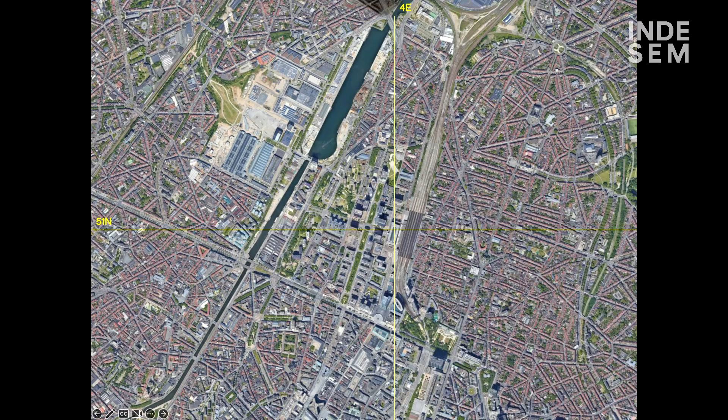I don't know if you've ever been there, but if you arrive through the North Station in Brussels, you end up in a very schizophrenic world, in between a large business district built in the 70s and one of the poorest communes of Belgium, in between corporate worlds and the poorest region of Belgium. In the middle there is a station, and in the station we have our office, in the former train museum, which is quite exciting.

We rent it from the NMBS, the Belgian Railways. Partly it's our offices, but half of the square meters we rent out. One of these spaces is a double-height mezzanine space, which used to be the central location of the first locomotive of Belgium. Now we rent it out as an event space, both to organizations in the northern quarter, social organizations, but also more corporate events, trying to mix the two and take an active role in our context.

I would try today to talk about 3 projects which work around the theme of obsolete buildings, and then talk about RECAST, a first introduction of RECAST to the world.

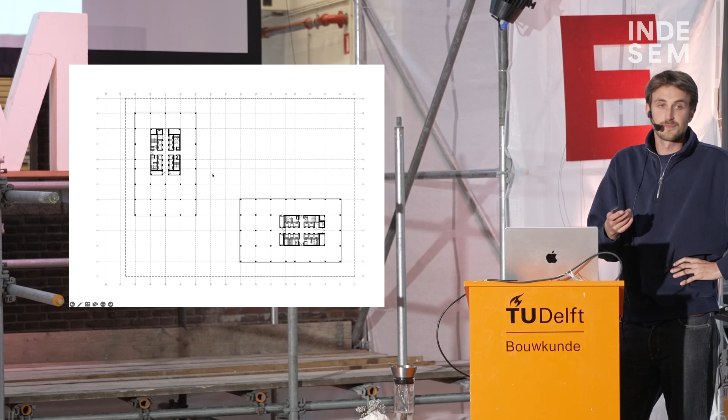In this context, these two buildings were there. They were vacant, considered end of life. The structure itself was too thin, a steel structure, so the columns and slabs were steel, not fireproof. The client or owner of this building organized a design competition to know what to do with this site.

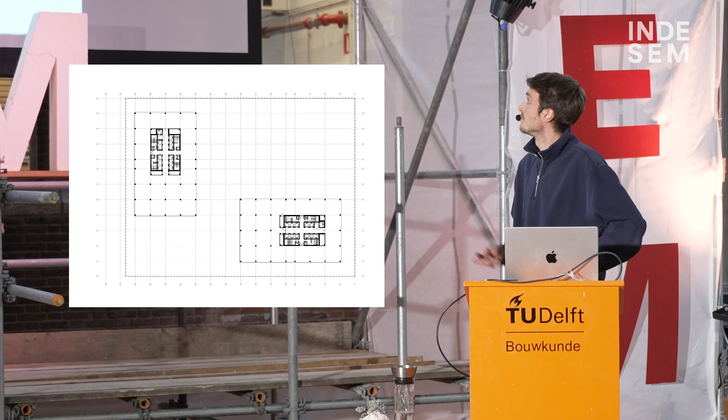Almost all the competitors got rid of it, they demolished it. And 51N4E came with this solution: to keep the cores of the building, the two central cores, and the whole foundation, everything underground. On top of this existing grid of columns, we rebuilt a new structure around these two cores.

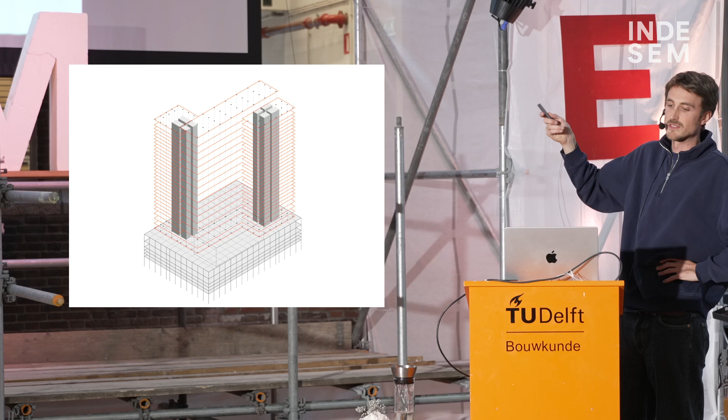But instead of rebuilding the two towers as separate towers, the idea was to build a third volume, the capable volume, a tower of 2-story high stories, skipping every floor. This resulted in this moment in the demolition, where the building around the core was demolished.

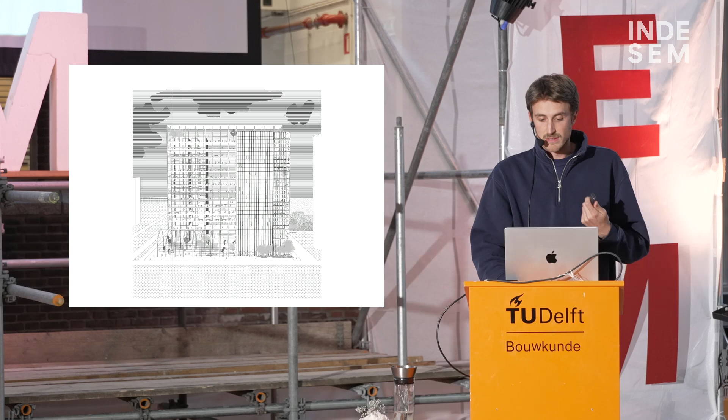We tried to recover as much of the materials as possible, but the cores were still there. The idea was to maximize the square meters around these two cores, keeping as much of the concrete and the CO2 embedded in this structure as possible. This is the sort of the two sections that you get.

Of course, if you keep the core and you keep the stairs, you have to keep the height of the spaces, which was actually too low for the Codex Welzijn, a comfort level required for a workspace. So we couldn't get the 2.70 meters that was required for the Flemish government to enter the building.

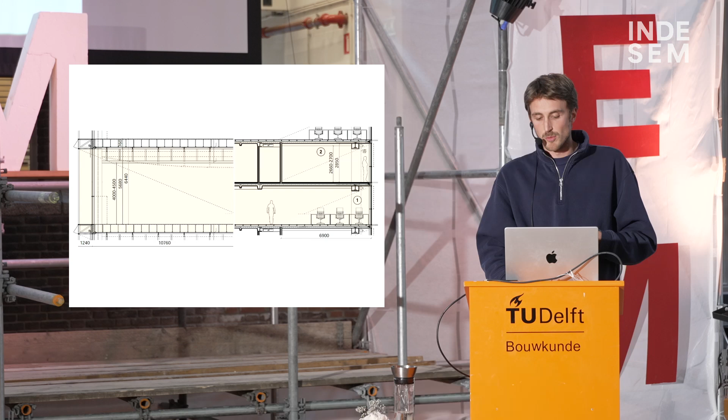That was the idea. The client wanted to have one big renter for this entire tower. That was one problem, and the second problem was that the Flemish government, the government of one part of Belgium, didn't want to work in towers because they wanted a sort of horizontal collaboration flow.

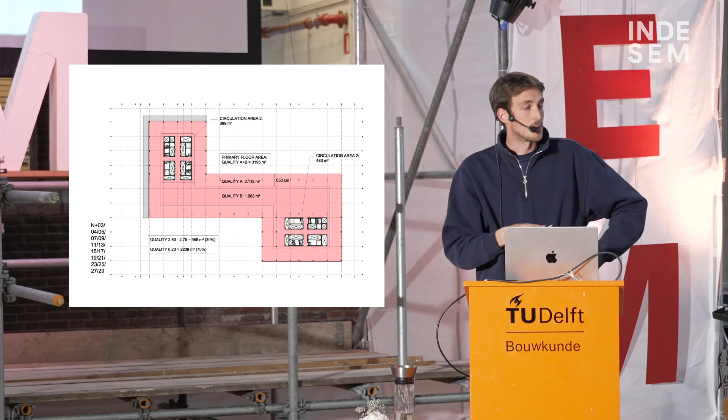By gluing the two towers together, you get these very big floors of more than 3,000 square meters of floor area. So all the odd numbers of floors had this plan where you had a sort of connection between the two cores. Another ambition was to make it a hybrid building, not making the same mistake as the past of creating a monofunctional neighborhood.

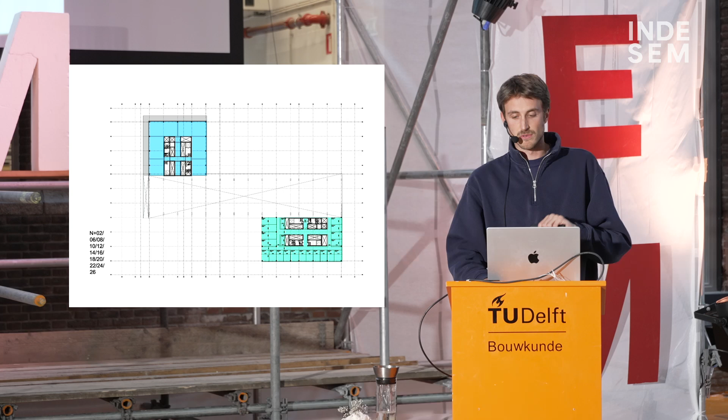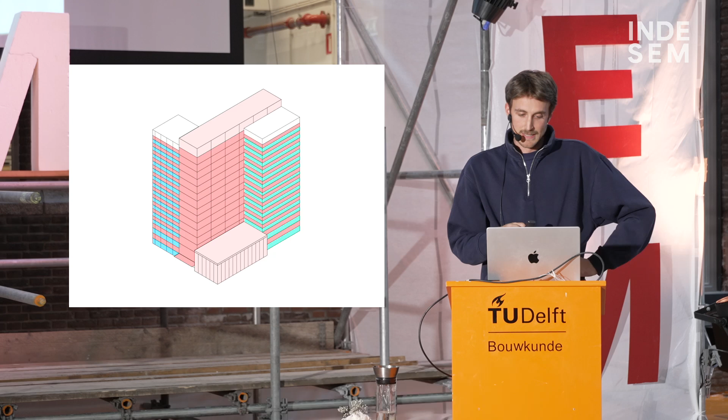Instead, the idea was to combine housing, hotel function, and commercial spaces, rather than making separate buildings for these functions. The even floors were for the Flemish government, and the odd floors were housing and hotel space. So you end up with what we call the zebra model, a sort of hybrid building, but still one building.

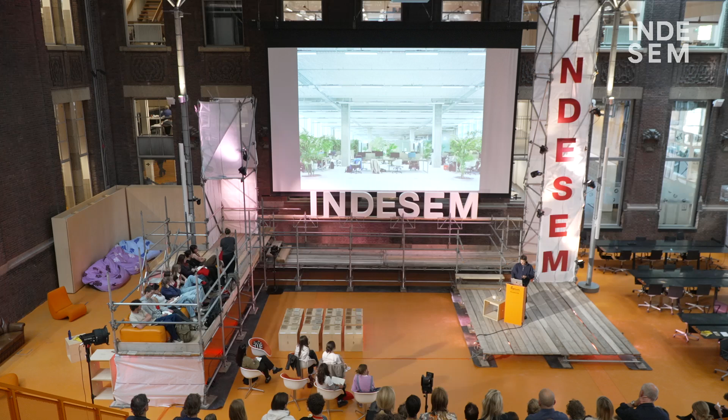This is the type of spaces that you get by having these super high floors. Because of the double height, you get the light way deeper into the building, which makes it possible to have workstations in the middle of the building. Normally you can only have your desk close to the window because the light needs to enter, and the further you go from the window, the less light enters. There's a regulation that doesn't allow workstations there, but because of this height, we could make this entire floor primary floor area.

In the two towers, the lower floors were this meeting center where no one would have a permanent workspace, so the height of 2.60 was not a problem, 2.70 was not a problem anymore. Then you have this big entrance lobby that sort of is this volume capable in between the two cores, organizing the flows.

Yeah, this is a heavy PDF, apparently. Something's happening.

Yeah, while waiting, I can maybe explain. So the stair, this main stair, when you come in, the idea is to enter the building. Okay, let's ignore this. Okay, restart. Well, let's skip the plan.

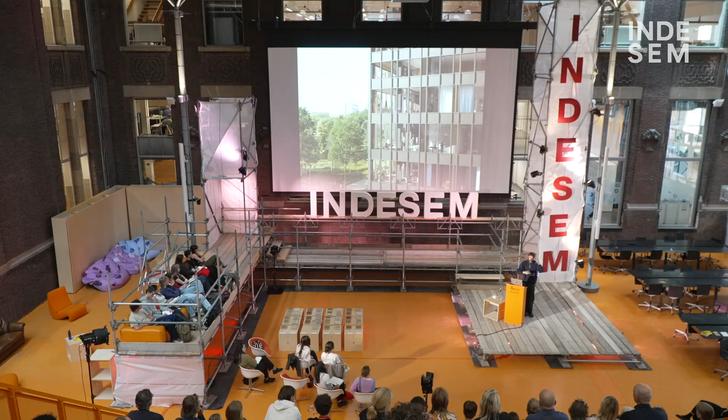Voilà. The idea is to enter in a big stair that takes you to the first level. So the elevator shafts for the office spaces are on the first floor, and the ground floor is actually the entrances for the housing and the hotel. So the same shafts of elevators can be used for both programs, but they never cross.

This was a solution to keep the existing elevators in the tower, but still organize it in a way that you don't get interference of safety, so that people of the housing don't enter the office space and so on. And that's the result.

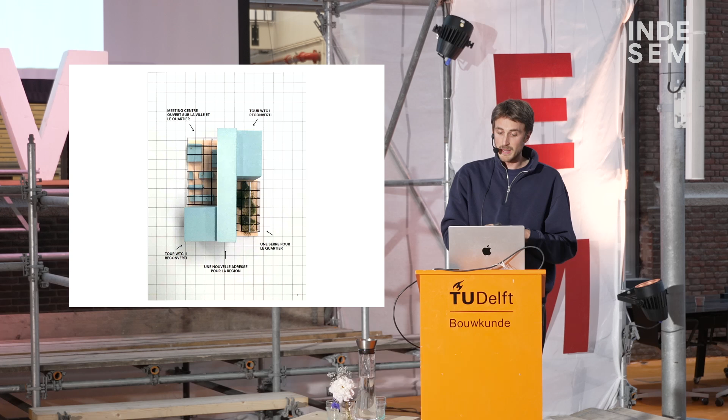So the volume capable has a sort of different architecture, and the two existing towers refer to the former Miesian architecture. And of course, on the ground floor, in between the two empty spots, this is a competition model. The idea was to make public space, which is not used exclusively by the three, but could be used by any of them.

So in between the two volumes, there is this greenhouse.

In Brussels, there is a regulation in this area that you need to provide 10 square meters, 10% of the footprint for green area. But because of these high towers, the quality of this green space is quite low because there are super high wind velocities. So if you're constantly in the wind, nobody actually uses the space.

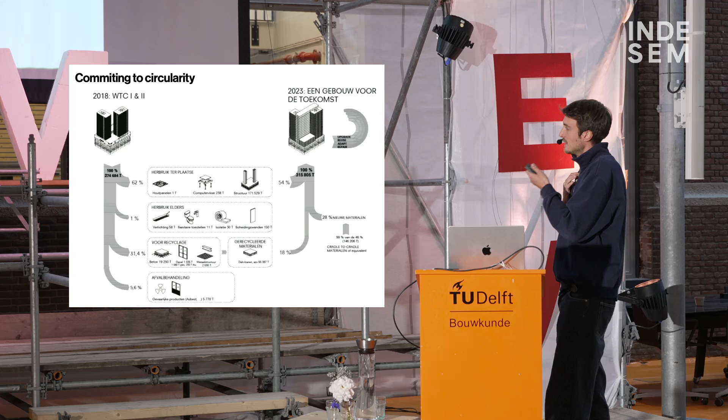So we came up with the idea to make this big greenhouse touching all of the different programs, which can also be used as sort of event space, a bit like this space we're here, which is connected to both the hotel and the office space.

Of course, because the building was made for the Flemish government, which had a very high ambition considering reuse of materials, we had the leverage to convince the client to investigate all of this reuse of materials. And one of the biggest impacts we made was by reusing the existing structure, which is almost 60%.

So this flow diagram is sort of the weight of all the materials that were in the existing buildings, the ones that are reused on site, reused somewhere else, and so on. But 60% of the weight of the building is actually reused just by reusing the cores and the whole parking building underneath.

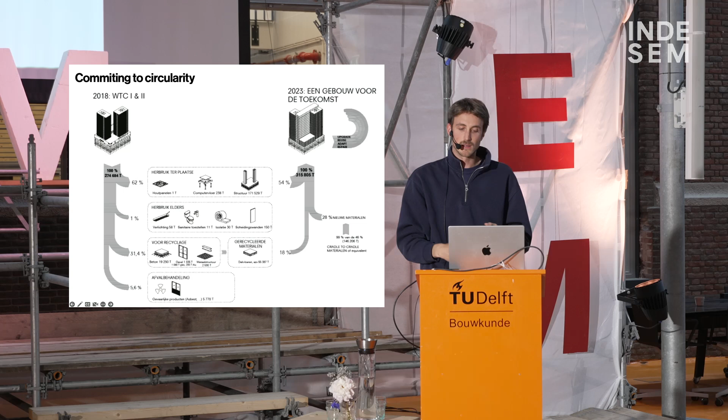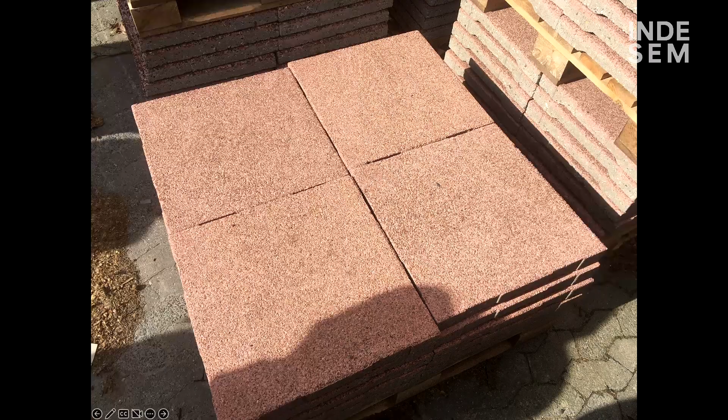Of course, there are other materials that we try to reuse as well. The washed concrete tiles that were used on the deck, these convector bakken, like the convector structure, sort of reuse. We did this together with Rotor, which is a Brussels organization that really focuses on salvaging these materials and reusing them and selling them in their space.

The concrete that was sort of drilled out, which was the top floor of the steel structure, was reused in the new concrete that was for the new structure. So that's the first project.

Another tower, actually right behind, is the World Trade Center. This is Victoria Tower, which used to be IBM office space. So the American IBM, they had this tradition of building these very nice, slick, well-detailed buildings, and this is one of them.

Before our clients bought this building, there were other developers that tried to renovate it, resulting in these sort of crazy, almost pastiche projects. But when the client came to us, so this didn't happen.

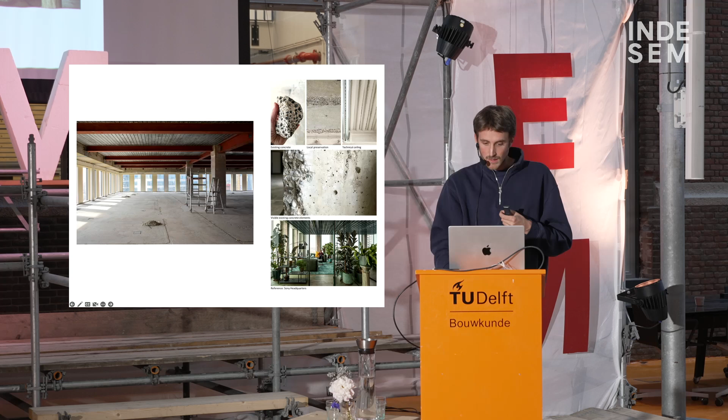The client's idea, again, was to reuse as much of the structure as possible, only interfering where it's really necessary. For example, these ventilation boxes that were on top of the windows, we took them out to clean it up, and then of course we had to add insulation to get to the current norms for heating. But the facade as a system was kept. We didn't reuse the material itself, which wasn't possible.

But this is sort of a test that we did to convince the client that it shouldn't only be an office building, but it could also be co-working, which of course is also office space, but also hotel. So in the end, the building again has a mixed function.

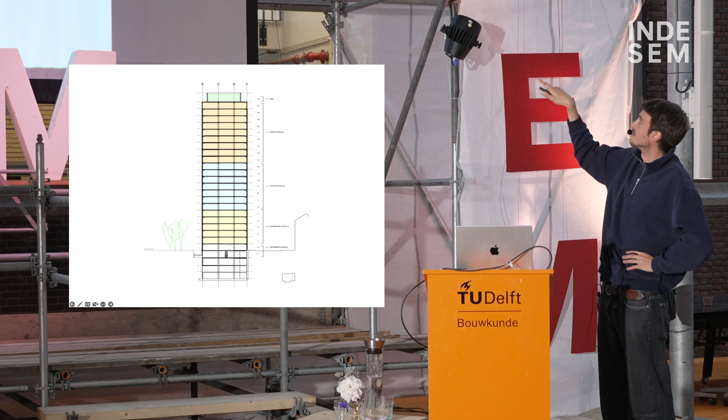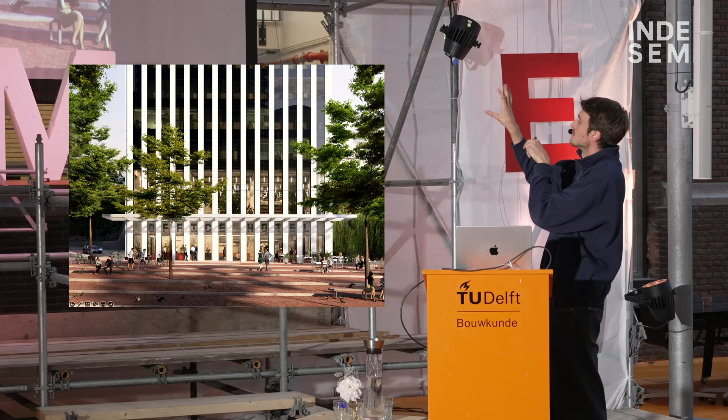So on the top, it's a hotel. Middle zone is like offices, and then 5 floors of co-working. And the thing that we really had to design in this building, because we're just keeping it as it is, is how you enter and how these flows of people are organized.

The idea was, and that's also what happened, that the hotel, since the building is connected to a park around, goes down into a double height space where there is the hotel lobby. But for the office spaces, you go up, and then there is what we call the piano nobile, the first floor, which has a double height space, creating a sort of central space in the building. The rest of it is just the normal slabs, but this creates a moment where you get air into the building, resulting in these 3 interventions: the roof terrace, the piano nobile, and the new canopy entrance.

That's the design. This is a picture from a sort of poetic moment before it got redressed.

The third project is this Recypark. I saw the picture on the wall there, so I think somebody knows this project already. This is a Recypark, a recycling park, quite close to the center of Brussels. So it's not on the edge of the city, but quite in the center.

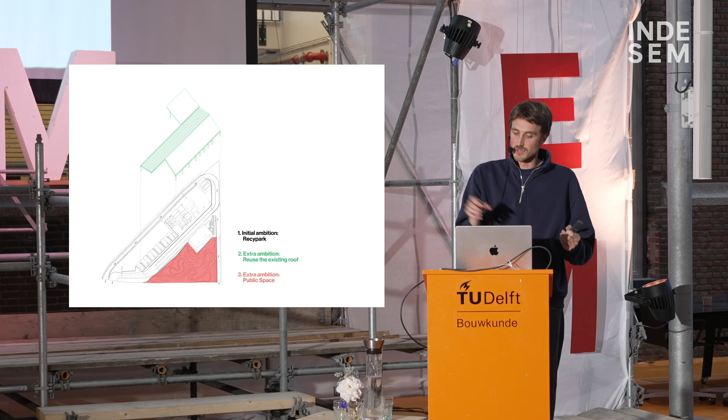So we could actually condense the functions in this smaller edge, and then there was a sort of leftover space. The idea was to combine, since it's in the center of the city, to make it really a public building, combining the Recypark functions, which is during the day, with also other functions.

Again, we worked together with Rotor, which had a catalog of existing wooden structures that were soon to be demolished and were sort of inventorized. In the design competition, we made several propositions of adding a sort of roof on the Recypark. We didn't know yet which one it would be, but this roof would provide a covered space in the center of the city, allowing for events to happen or different functions.

In the end, we won the competition, and the program that got selected was a skate park, a covered skate park, which didn't exist yet in Brussels.

Then the tricky part was to get this wooden structure from somewhere else. In the end, the structure was reused from somewhere in Liège, about an hour's drive, a former horse-riding manege built in the 70s. We decided to move it, rebuild it there, and use it as a structure for the roof.

But this was quite complex in a way, because reusing structures is not as straightforward as you might think. We didn't know the quality of these woods, we didn't know how it was made, what kind of glue was used.

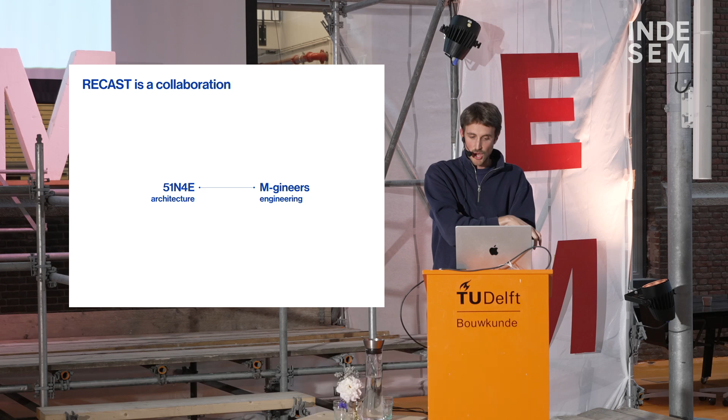Okay, so now I want to talk about RECAST. As explained, it's a new studio within 51N4E, which is a collaboration between us and M-gineers, an engineering company. As you saw in the previous projects, a lot of the constraints that we meet by reusing structures or infrastructure are of quite technical nature.

So combining engineering and architecture, space design and technical design in one team was sort of self-evident. I don't know how this works in the Netherlands, but in Belgium these are quite two worlds that sort of work together haphazardly, but never in an integrated team.

The idea was, if we combine our forces and have an integrated approach, we can scale up the reuse of these buildings because of the methodologies that we build together and that we can use quite fast and in a scalable way. So the idea of RECAST is to repurpose existing buildings with maximum reuse to provide a realistic solution for Europe's 2050 ambitions, because the idea of Europe is to go net zero in 2050, which is in 25 years.

But in order to do that, we need to renovate a huge amount of buildings. It's crazy. But at the same time, we don't have the industry to do this. So I made a quick calculation.

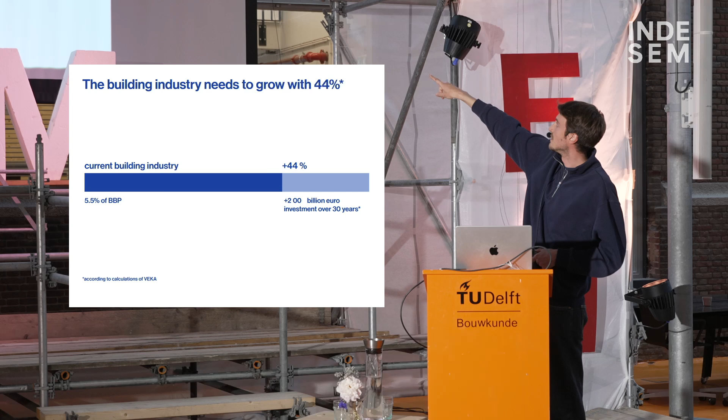The Flemish government had to do a calculation, requested by Europe, on how much money it would cost to renovate their entire building stock. They said it would be around 200 billion euros. This was in 2020. If you invest this over 30 years, every year 1/30 of this 200 billion, you would need a building industry in Flanders that has to be 44% bigger than it is now. So we don't have the money, but we don't have the people to spend it either.

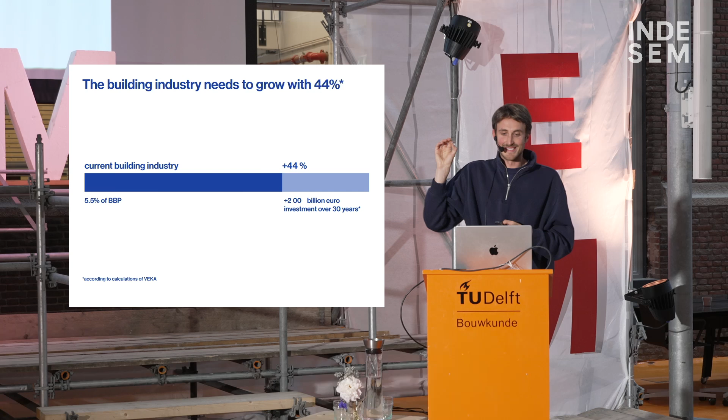So this ambition is super important. It's where we have to go in order to reduce our carbon emissions. But if we don't do it well, every euro that is spent has to be spent well, because otherwise we're increasing this light blue bar even more.

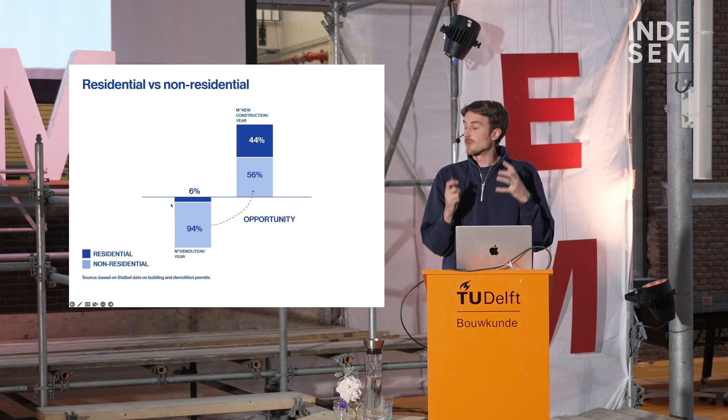A second observation we made was that we took the Statbel data, the statistics of Belgium, and looked at all the cubic meters of buildings demolished every year, divided into residential and non-residential, versus what is being built new. Of course, sometimes you need to demolish in order to build. But if you look at the percentage of building volume that is being demolished, 94% of it is non-residential.

And what we see is that a lot of the regulation around sustainability is focused a lot on residential policies, because it has a big impact politically, I don't know. But we saw that not demolishing non-residential buildings is a huge opportunity to reduce these cubic meters newly built every year, which emit a lot of CO2 in order to build them. So that's the backdrop against which we were convinced that we had to do something.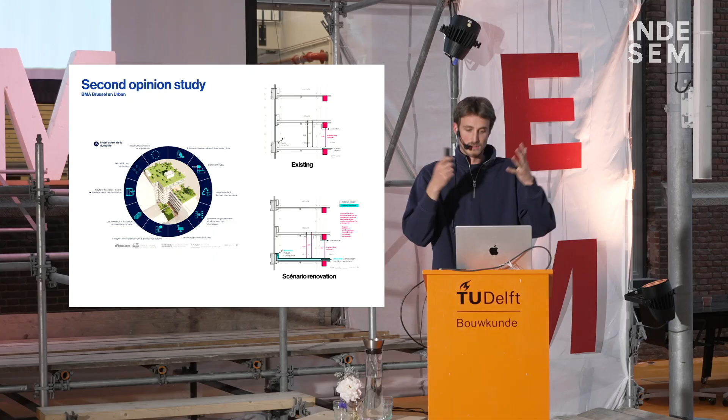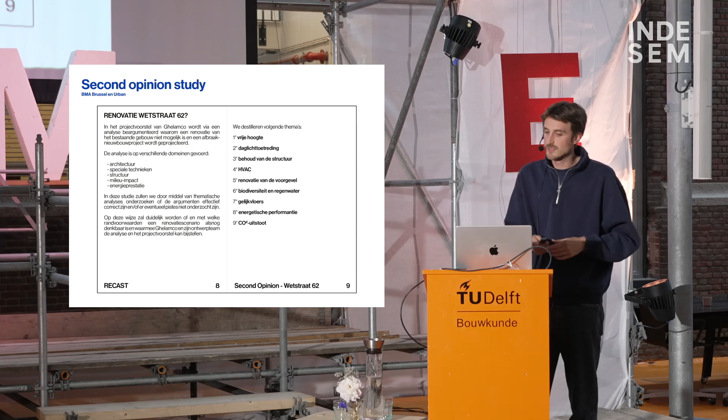They said, okay, if you want to add ventilation, which we need to meet today's regulations, it's impossible because you have to cross this beam. Also the ceiling height was too low. If you had to add a false floor, the ceiling height would become too low, and it's impossible to sell this type of building in the current market. So they made this list of arguments, and we got the time and the money to go through all these arguments and start to give counter-arguments.

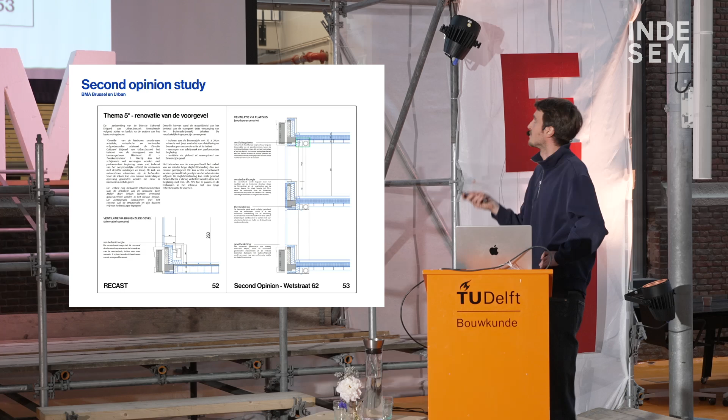For example, of course there are solutions for reorganizing the ventilation in order to not have to cross that beam. So we came up with design solutions that countered all of their arguments. And the building is still there, so let's hope. Also, Ghelamco stopped the project, so they didn't buy it. Let's hope that this still works.

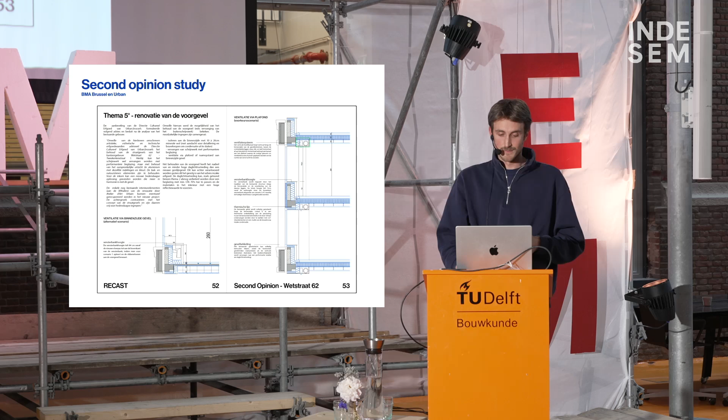And that was the first time RECAST as a name, as a collaboration, was coined. Second project, which is way bigger, is the CNTR project.

I think it's important to understand why this building becomes obsolete. It's a building in the center of Brussels, in the European district. There's a huge amount of office spaces, but the market is decreasing because people work from home, especially in the European center. There are fewer expats because we can work from home digitally, and this market is shrinking. So everyone wants the best building in the market to attract companies. This building becomes obsolete because it's not the best top-notch building anymore, but it's still a very good office building. That's not the problem. The problem is that it's not the best, and that's why they demolish it, or reuse it, or rebuild it with the green sauce on top.

That's this kind of project. Which is completely different is this project, the CNTR project, the last one I'll show. It's the same client as the Victoria Tower who came to us, and they wanted to buy a portfolio of 22 buildings, built between the 70s and 90s by the Belgian government for their tax offices. They were located in small cities, not big cities, around Belgium, cities that don't have a market for office buildings.

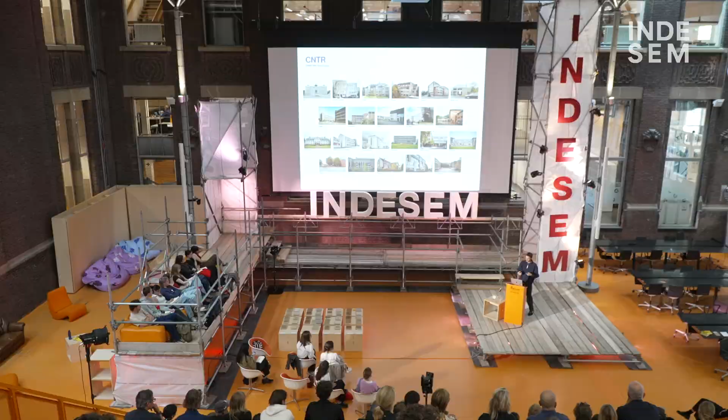He bought them with the idea that we don't want to demolish them. All the other developers who wanted to buy these buildings wanted the parcel they were built on, in order to redevelop residential houses. But our client said, okay, we don't want to demolish it. We want to reactivate these buildings, even though they'll probably not be office buildings anymore. So these buildings become obsolete because of their function, unlike the previous project, because they're not top-notch anymore.

But that's interesting because these buildings are sort of unique projects in their context. They're often the biggest building in town, and they're quite cheap. They're in good condition, which allows, for example, schools, care facilities, and social organizations that don't have a lot of money to do minimal intervention in these buildings, reactivate them, put new users inside, and reuse the building for another 10, 20 years. So that's why we very enthusiastically said yes to this project.

Because it's a portfolio of 22 buildings, we had to come up with a strategy and organize ourselves, because how are we going to work on 22 buildings at the same time with a small team of engineers and architects and the client together? So we organized the atelier space, a central space where we work together three days a week, the client, engineers, and architects, to have a short line of communication and work together on all these buildings. And we made a methodology consisting of two steps.

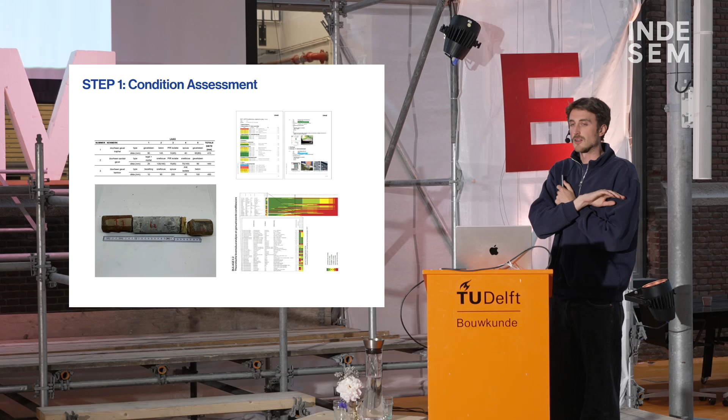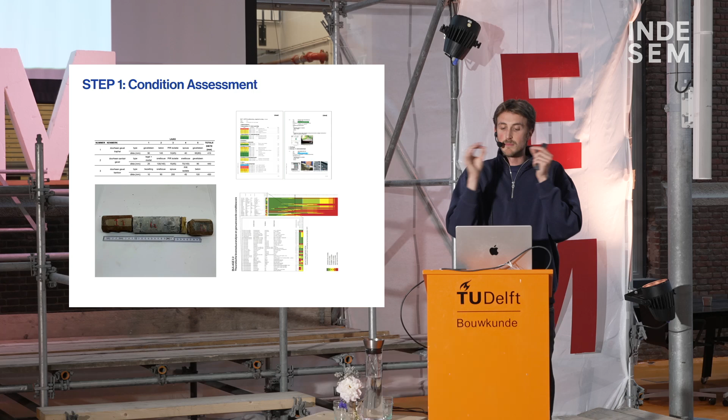First step is to do a complete analysis of the existing building. What is the building as it is now? Not referring to older plans, but really looking at the concrete being used, the techniques in there, the quality of the aluminum frames, the roof, what we need to replace now, what's still in good condition. By mapping these buildings, which is huge work, we knew exactly what condition they were in. So if we knew a school was interested in a building, we knew you're going to have to replace this and this, but these are in good condition, you don't have to touch it, so you can reduce the interventions you need to do in the building.

That's the first step: looking back at what the building was, what happened in the past, and what it is now. The second step was to guide the process of reactivating it, trying to find a new horizon, a new future for the buildings.

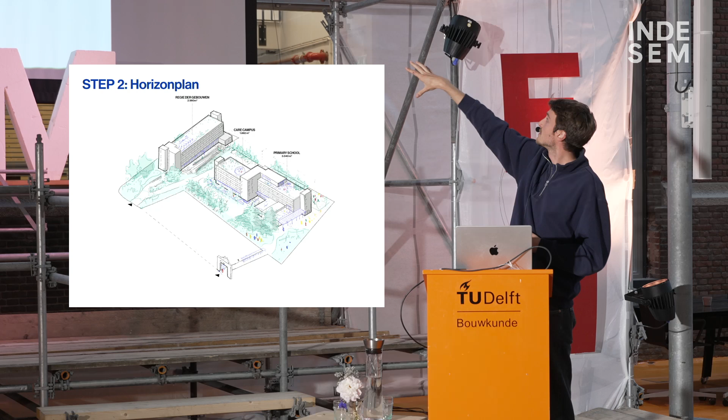One example is this building in Halle, a small commune in the center of Belgium, which had a site with two buildings that was too big. The Belgian government wanted to keep only one of the buildings, renovate it, and leave the other vacant. So we started a process, going to the mayor and asking what type of program they needed. In the end we came up with a combination, a campus where one building would be the Regie der Gebouwen, the Belgian government's building, and the other would become partly a primary school and partly a care campus.

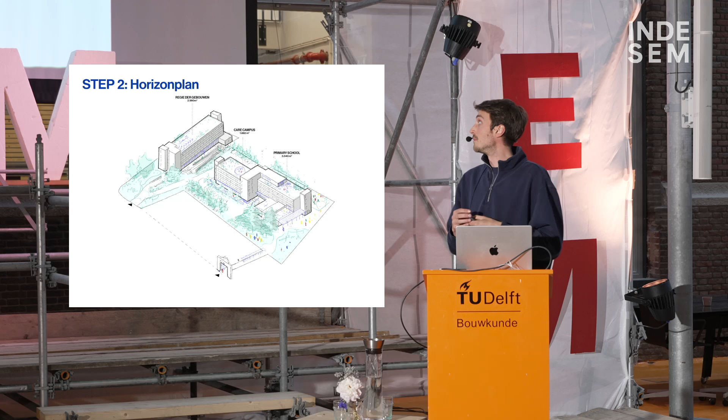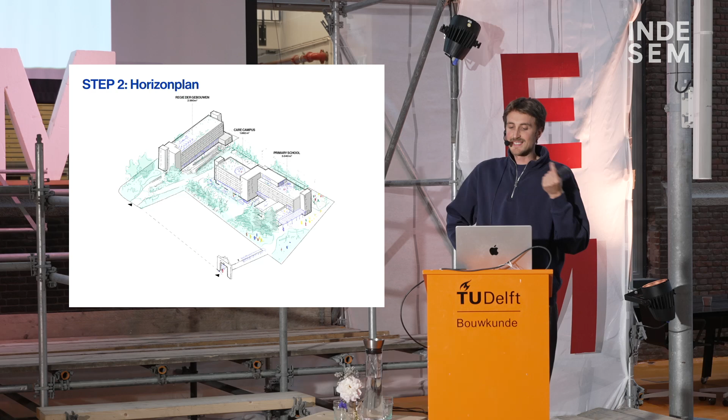Because we had this knowledge of the building, we convinced the investor, a public investor, to buy it, them being confident they would be able to fit the program in there. Just by facilitating this process without designing too much, only convincing them of the qualities of the building, we could extend its lifespan, which is an interesting approach as an architect, because you're not really designing too much.

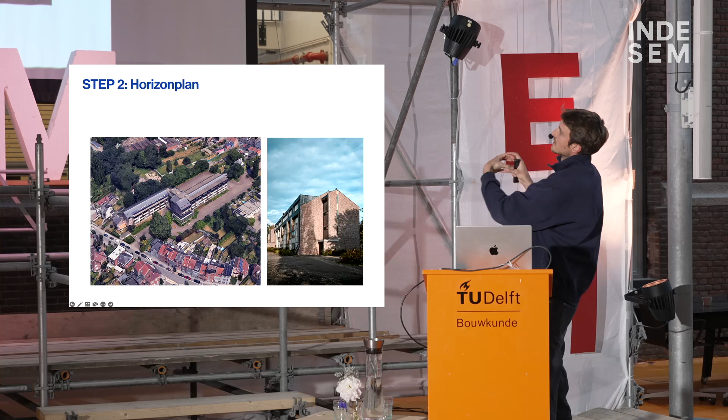The second project is this one in Vilvoorde, quite similar in plan layout. It's a building that tries to look like a small house, but it's actually extruded into a big building of 8,000 square meters. Now we're in this process. In two days we'll have a plenary session with, I think, 15 organizations interested in being part of this new care campus.

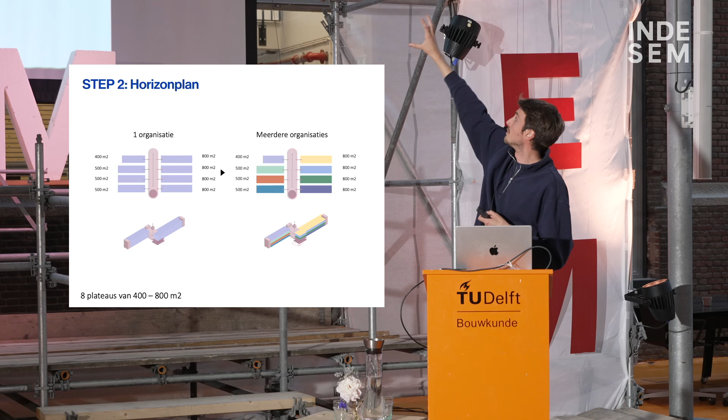The single organizations become a combination of childcare, a medical center, and other organizations linked to care or integration, a school for volwassen onderwijs, adult education. Because they are in the same building with one address in the center, there is an interesting ecosystem of care facilities that can exist there.

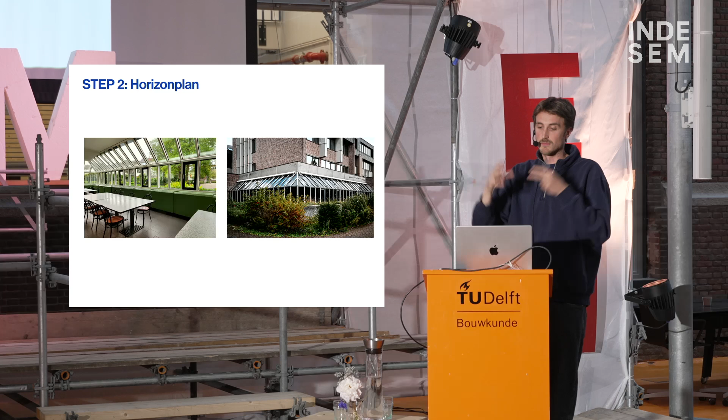There's this old cafeteria that could become the buurtcafé, the bar that is the central location in the building.

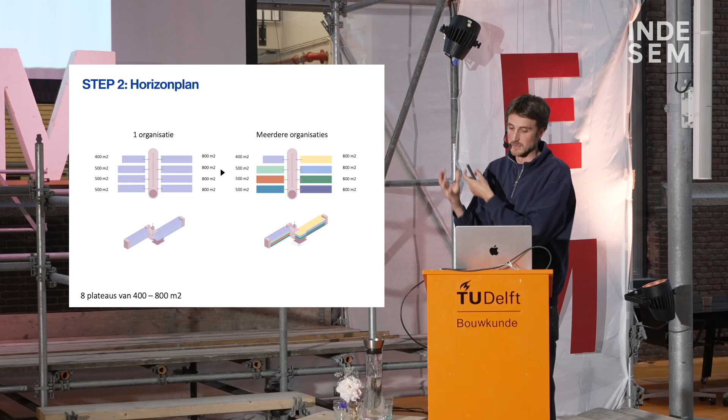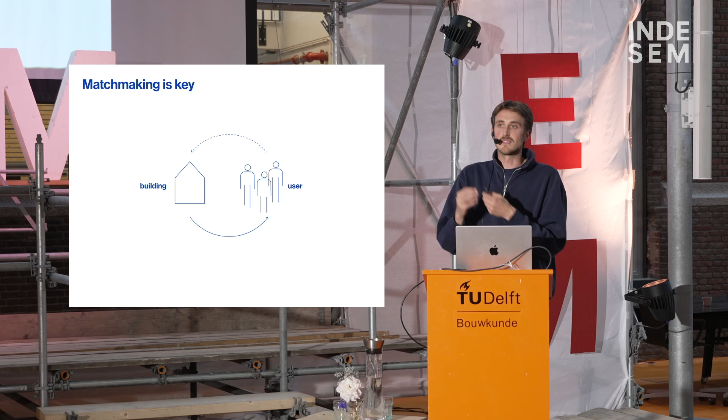What you see is that we're not designing with this building — it's already built, you might like it or not, it's not the most interesting facade, to be honest. But we're designing the use of this building and trying to convince the different care organizations to be part of this story, changing the narrative of how you look at it, which is a second layer in architectural design. So instead of making a building for a user, we already have the building, and we're trying to find the right user, which makes this obsolete building a reused building with a lot of qualities.

Now I'd like to dive a bit deeper into the numbers. Because we had this big portfolio project, the client allowed us to take part of our time to dive deeper into the sustainability qualities of what we're doing. The client needs it to sell the project, but for us it was super important because we wanted to know if what we're doing is really better — better to keep this building, or just demolish it and build something new with perfect insulation and a heat pump and everything else. So we got the time to dive deeper into our projects.

One of the first things we did was convince the client that if you want to look at the sustainability of a building, you don't only look at operational energy, like EPB labels which get a lot of focus in our regulation, but also look at embodied carbon, the full life cycle. If you want to build a building, you emit a lot of CO2 as well.

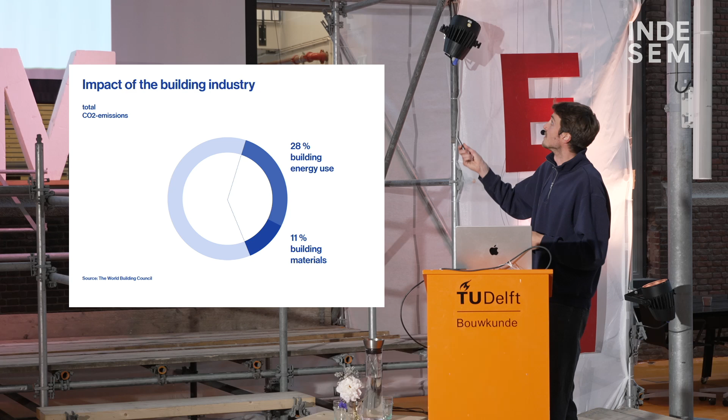So 28% of the total CO2 emissions—numbers shift a bit depending on the source—but it's about 28%, and 11% is the total CO2 emissions of building materials. If we only look at this 28% and make policies that say we have to reduce emissions from heating and cooling and don't look at building materials, we might even increase this 11% and end up with a higher CO2 emission overall. So taking these two elements into consideration together was key in our projects.

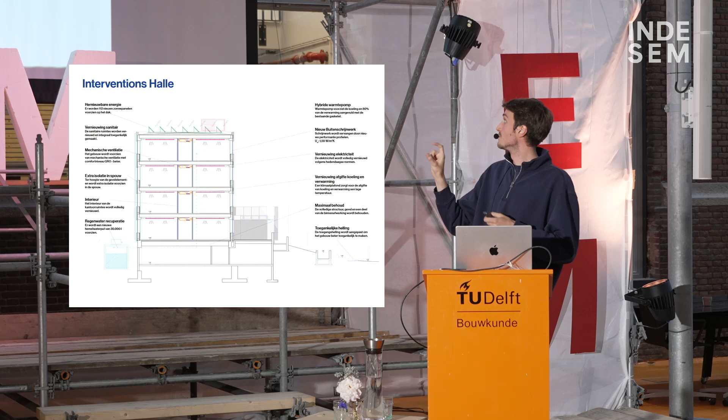This is the project in Halle that we're renovating now. As a section, what we're doing is quite limited. We keep the facade as it is, replace the windows, add ventilation, put solar panels on top, add a heat pump, and install a low temperature heating system which works more efficiently. But we keep the structure and the facade as they are, which makes this building have the same comfort qualities as all the other buildings being built now, but it looks like a renovated building, of course.

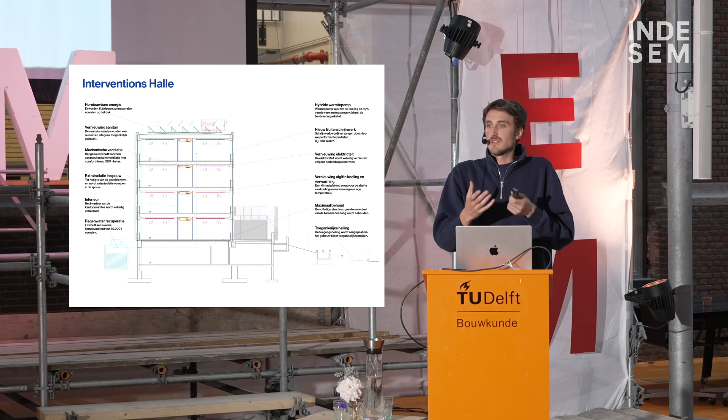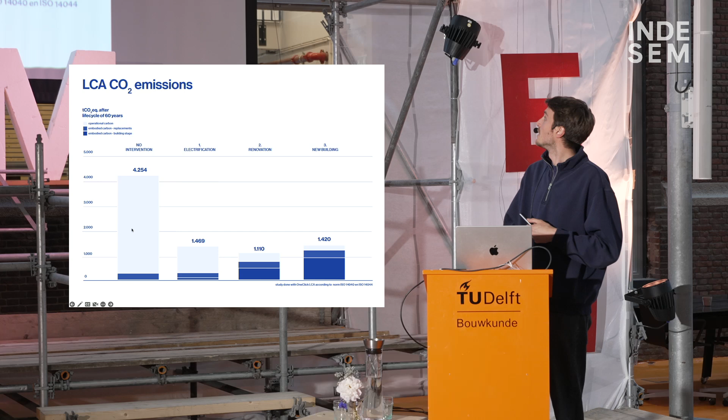And then we did our calculations and made four scenarios. One: what if you don't do anything, keep the building for another 60 years—what is the total CO2 emission? The light blue is operational carbon, the CO2 emitted by using the building; heating is the biggest impact. The dark blue is embodied carbon—what you emit replacing windows after 30 years, renewing the floor, these things you have to do constantly while keeping the building as it is. Of course, it's a lot of CO2, so we have to do something, that's clear.

The three other scenarios are electrification. What if we keep the building as it is, but just put in a heat pump instead of a gas furnace, gas heating? What if you replace the gas heating with electrical heating? Then you see it reduces the CO2 because electricity in Belgium is quite clean due to the high percentage of clean energy. Okay, never mind.

And then, of course, there's the scenario where we don't do anything and keep it as it is. Second is renovation: we replace the windows and the heating system and so on, but keep the rest of the structure, which results in the lowest total CO2. Then there's the option of rebuilding the building entirely, insulating it perfectly. That would end up with almost the same CO2 emissions as not doing anything but just electrifying. For us, this was surprising—that not doing anything is actually better than replacing a building with one that is, according to current standards, almost zero energy. It's actually the same.

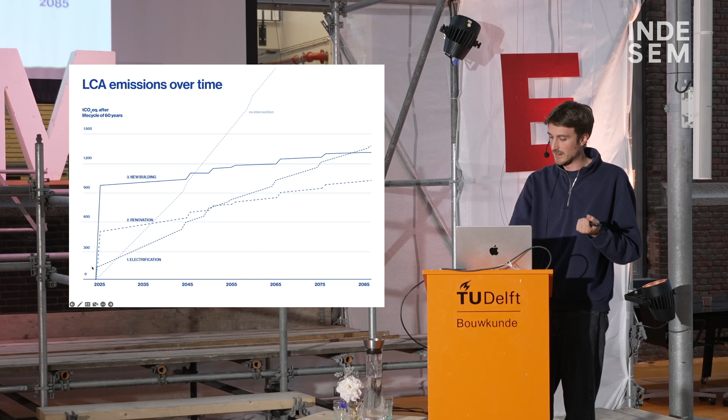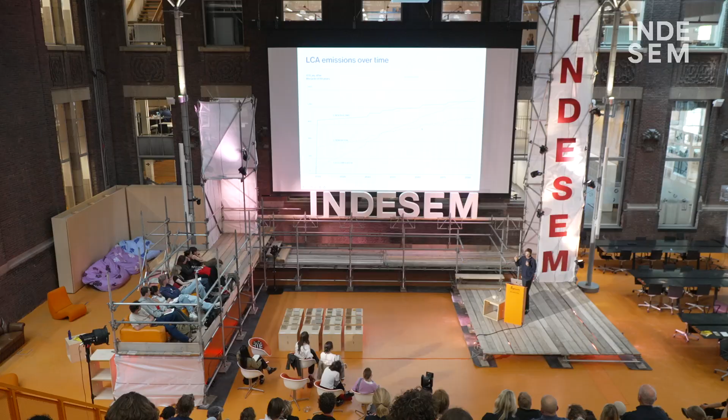But this doesn't tell you when these CO2 emissions are emitted in time, which is quite interesting. If you build a new building, the CO2 is emitted now—the dark blue is CO2 emissions now. You emit a lot of CO2 now in order to reduce it in the future, so the line becomes very flat. The electrification scenario has very low impact now—you just put in a heat pump, which has some impact, and add solar panels. Because it uses more energy since you don't insulate extra, in the end the CO2 emissions are almost the same as a new building. Renovation is somewhere in between: a medium carbon spike in the beginning, then almost as flat as a new building. And if you don't do anything, it's a steep line—we don't really talk about that option.

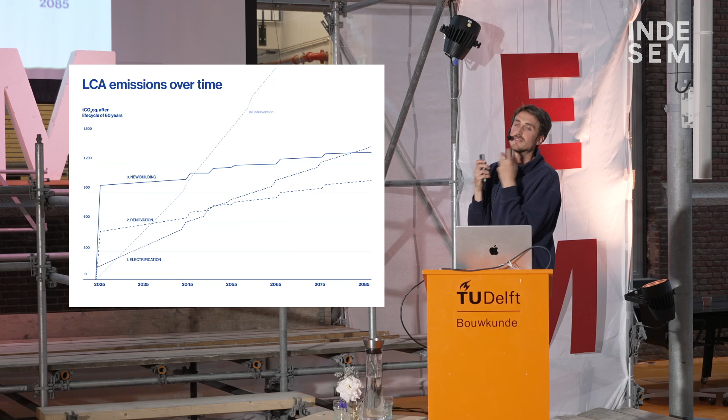What this doesn't take into account is the energy transition happening—we are replacing gas-made electricity with renewables. If you take this into account, and assume Europe reaches net zero by 2050, that's the ambition, it also means the electricity you take from the grid goes to net zero by 2050.

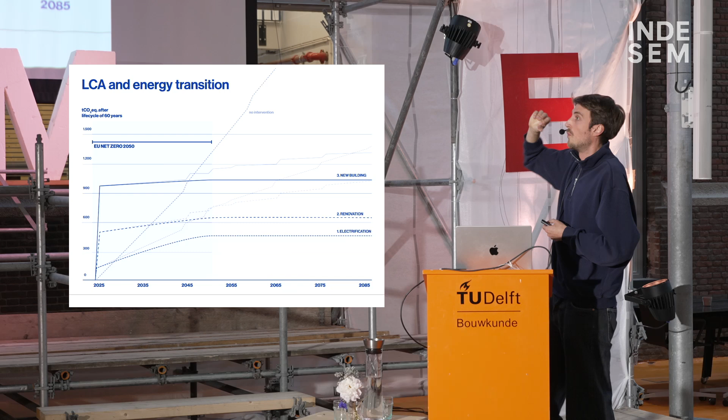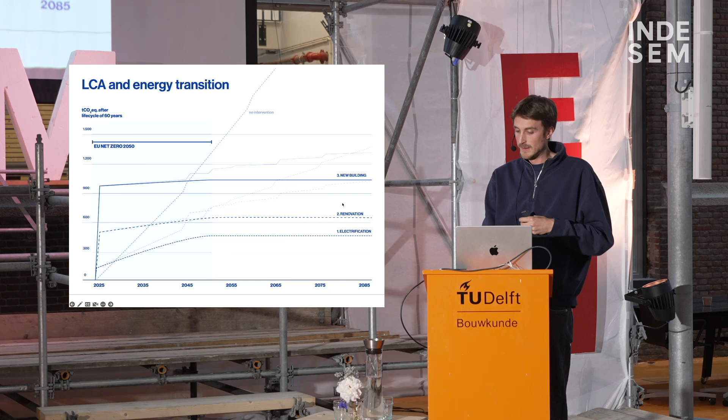So we're wasting our energy. I don't know how this works in the Netherlands, but in Belgium, we're wasting energy demolishing and rebuilding green buildings that are actually in the highest scenario here - which is not only way more CO2, it costs a lot more money, it takes more energy, we need more hands on the brick than for a small renovation. So we're actually doing the opposite of what we should do.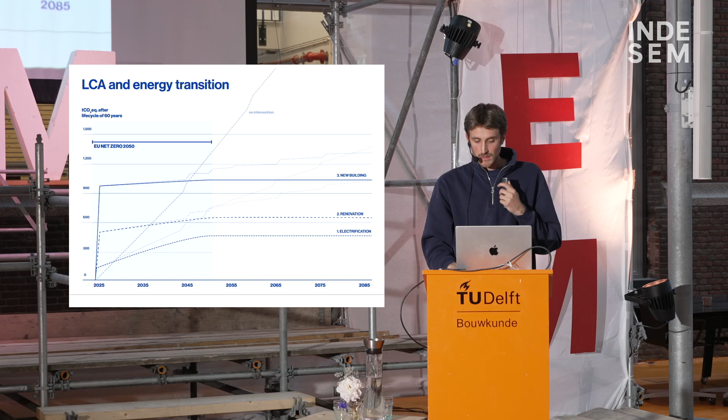And the question is, why are we doing this? Why are we building new buildings instead of just remaking them? Because of course, if you build a new building, you increase the comfort - that's what I was talking about in the previous project. If you build a new building, you can build it like you want, make the ceiling height high enough, and make it look new, which is also important.

So the comfort, in this case, is the trigger. That's the reason why we're doing it like we're doing now - acoustic, thermal comfort, air quality, heritage value. Of course, it's not a problem if you demolish. Accessibility is also quite an important one - sometimes elevators are too expensive to build in existing buildings, so we just build a new one.

But these comforts - what we try to do with RECAST is to always balance the increasing comforts against the cost that it has, in CO2 and in euros.

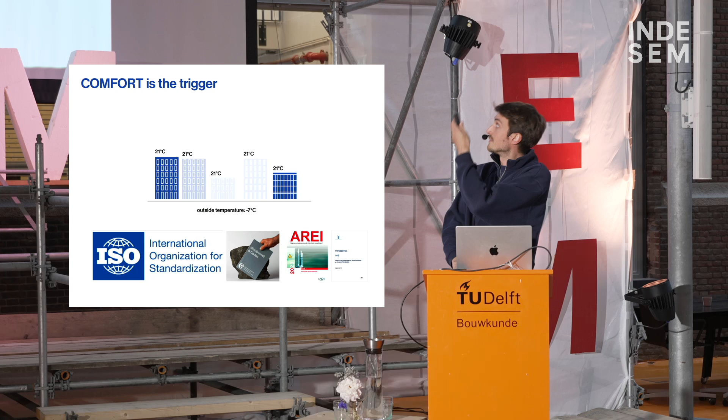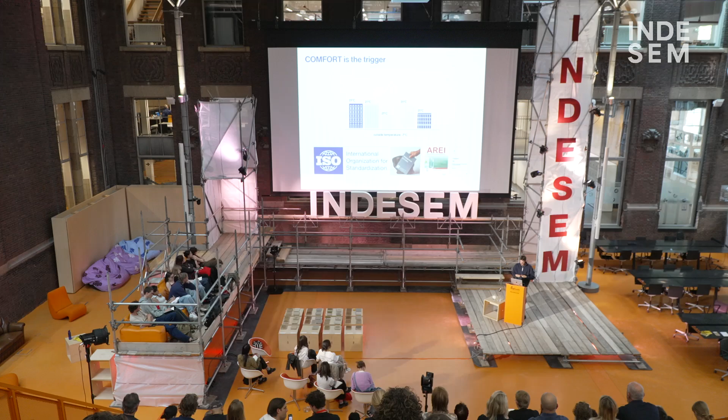Because, for example, all the norms that make you change your building - norms in Codex Welzijn, for example - the fact that the ceiling needs to be at least 2 meters 50, or 2 meters 60 or 70, reduces the things you can do with the building. So they're really imposing a sort of hard, deep renovation or demolition.

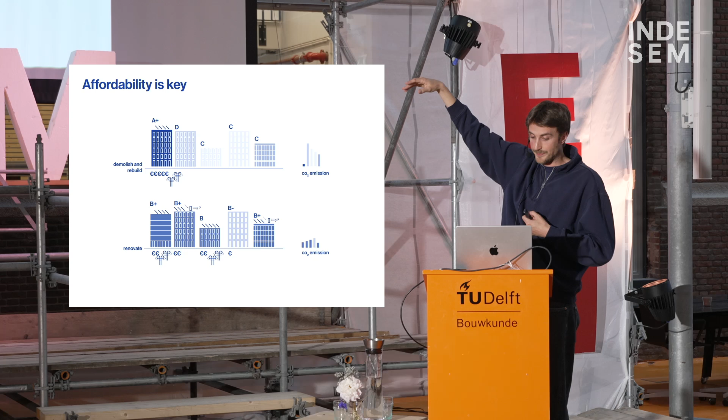And of course, this affordability, as I said earlier, is key if we want to reach the 2050 goals of Europe. Because if you imagine you have 5 buildings, all in bad condition, and you take all your energy and money to renovate or rebuild and demolish just this one building to the best, top notch level, like we saw in the project by Gelamco, then we don't have the money to spend on all the other buildings.

So you can reduce one to the top notch, but all the others will still be there. If you renovate in a clever way - only do the things that you need to do, increase the comfort to the maximum level but not necessarily to the best - then you can have a way bigger impact for the same cost.

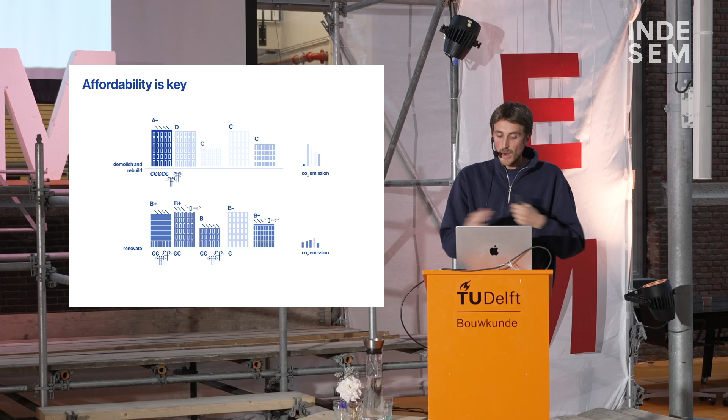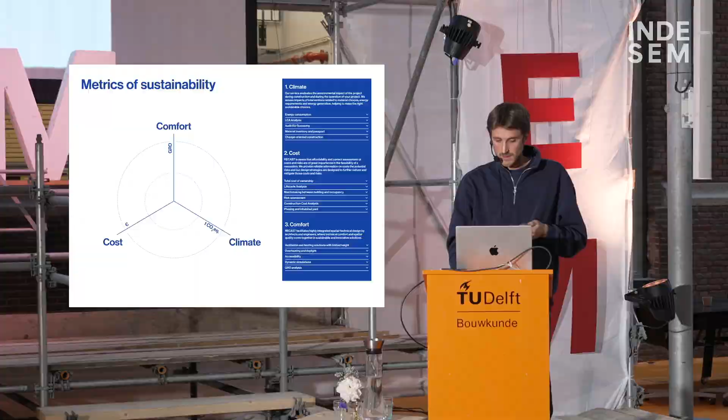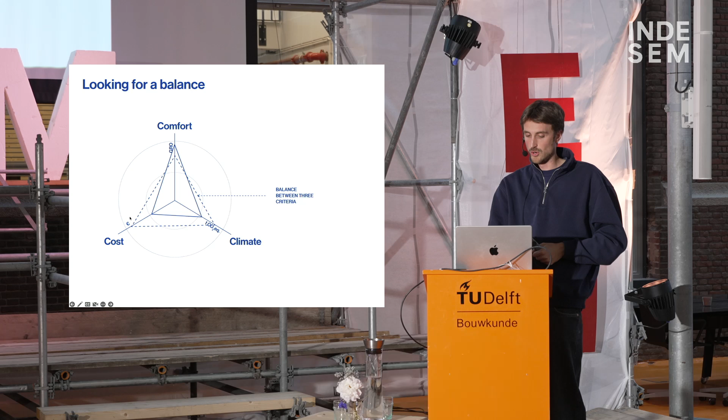So what we try to do is to always weigh, in this sort of triangle graph, the increasing comfort. The further you get from the center, the better - so this is lower CO2, lower cost, higher comfort. The dotted line is a renovation strategy where you say, okay, maybe we don't need to go to the best level of comfort, but we win in cost and climate. That's a graphical representation of the balance we always try to make here.

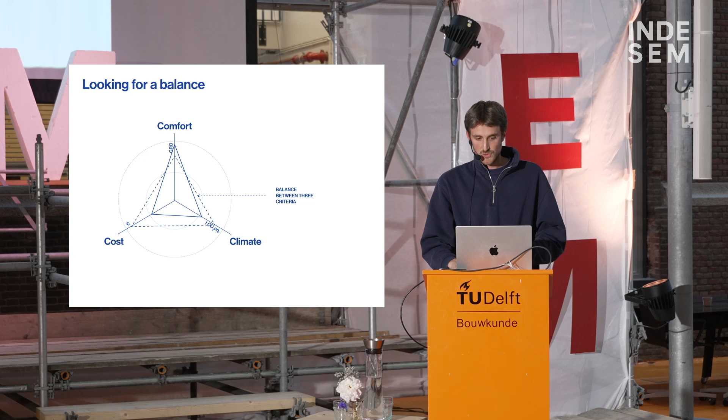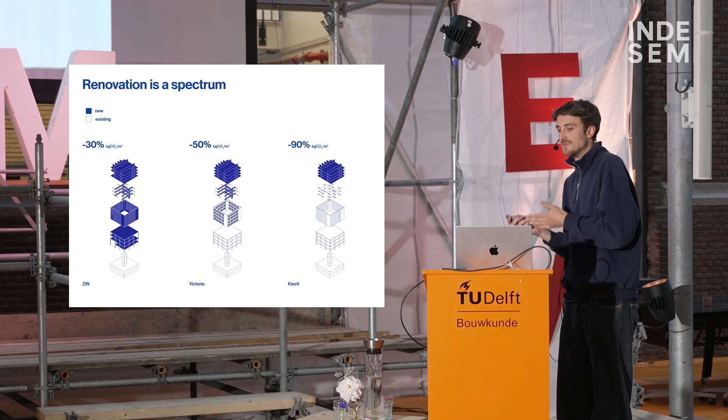And then as a conclusion, I showed, I think, 5 projects. What you see is that they're all completely different, so there is not one perfect renovation. It always depends on the client, the context, the quality of the building, and what you can do with it. So renovation is a spectrum, and this allows for different interpretations, or allows you to design with it.

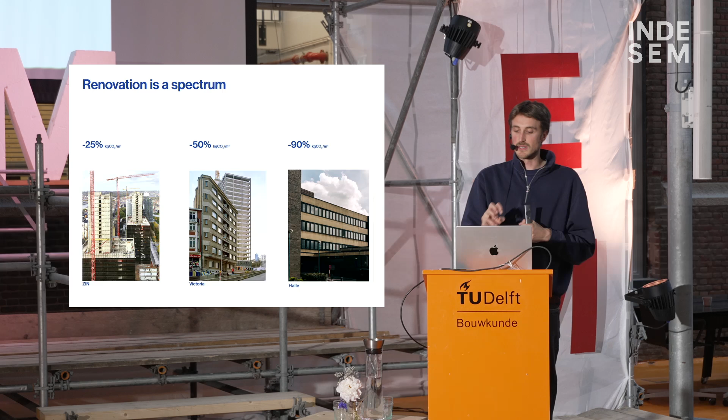For example, ZIN is 25% less CO2 than a normal benchmark building. Victoria, because we kept the entire structure, reduces 50% of the embodied carbon. And in Halle, it's almost 90%. So of course the context was completely different, but as an architect or designer, you can try to find your own way in reducing this impact. Voilà, that was it.

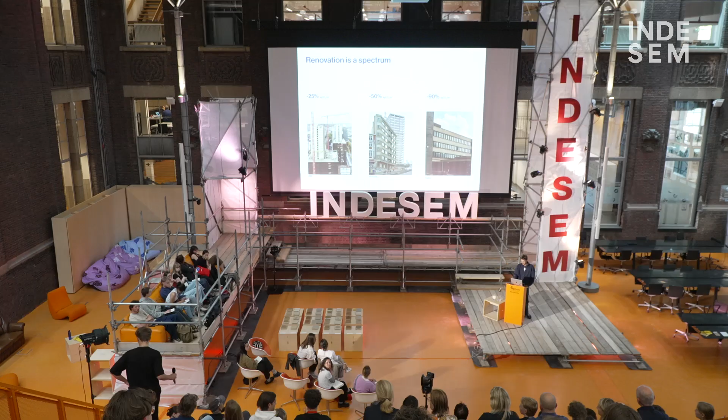Hi, I have a question about the two towers, and I think also the other towers with the long lines. Did I understand correctly that you took all the facade off? Yes. And then you put it on again? Or maybe I missed something, but what is the reason behind it?

The problem was that the building was not fireproof enough. A steel structure can melt - that's what happened with the World Trade Towers in New York, the heat melted the steel, which made it collapse. So for high-rises, it's a big problem. Of course, in the 70s they didn't know this, or it wasn't a problem yet. But because they couldn't add fire insulation to the structure, which would be far too expensive and was something the fire brigade didn't want, they had to demolish this part of the building.